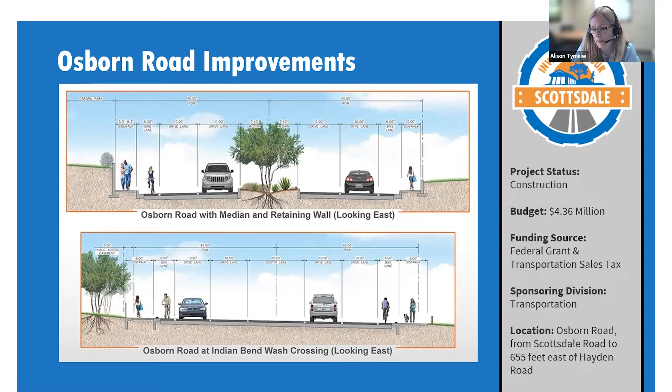I'm going to start talking about some of the projects we have either in construction or design. This slide shows the Osborn Road Improvement Project, located on Osborn Road from Scottsdale Road to Hayden. It includes the construction of bicycle lanes and sidewalks along this segment, a connection to the Indian Bend Wash Path, and a roundabout at the intersection of Osborn and Miller. The project is currently under construction and scheduled to be completed by the beginning of 2023.

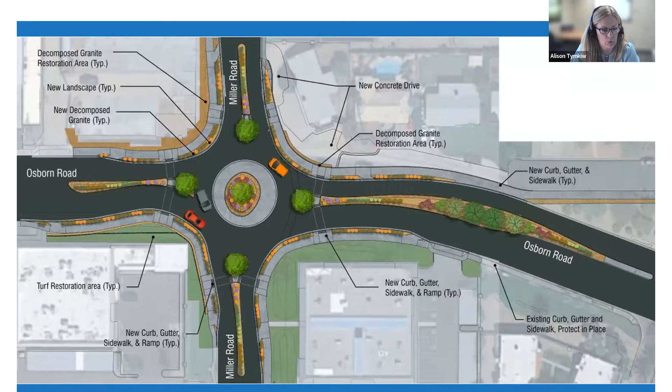The next project is the Raintree Drive Extension Project, currently under construction and funded by the Transportation Sales Tax and MAG Prop 400. It is located on Raintree Drive between Scottsdale Road and the Loop 101 freeway, and is intended to provide a direct connection from the Loop 101 to Scottsdale Road through the Airpark. We are planning roundabouts at 76th Place and Redfield, and at Hayden and Raintree.

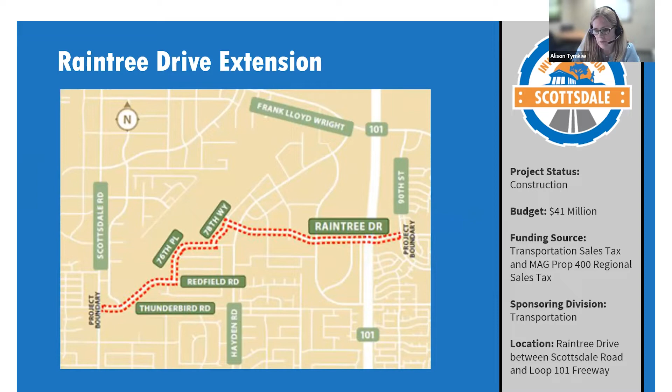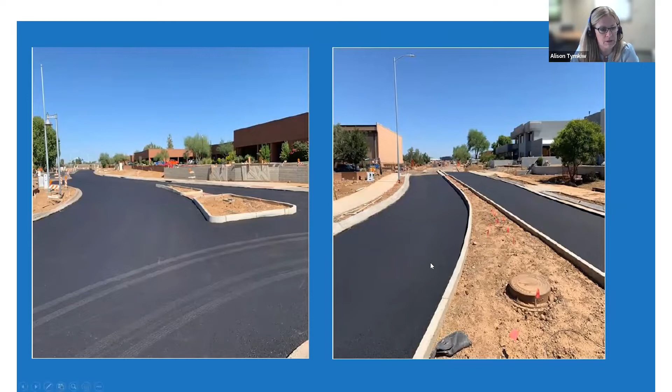The next slide shows the construction at 76th Place and Redfield, where the roundabout is actually being built right now. These pictures show the base pavement that was already installed, and the following ones show the roundabout further along, including the landscaping in the center. We still have to complete final pavement, and after that, striping will be installed.

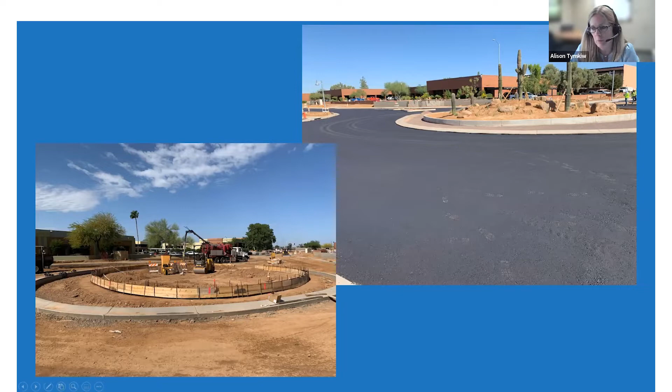The next project is another transportation-funded project: Pima Road improvements from Pinnacle Peak Road to Happy Valley Road. This project will increase the capacity of Pima Road with additional travel lanes in each direction, a raised landscape median, curb and gutter, bike lanes, and an 8-foot sidewalk on the west side. It also ties into the Happy Valley Road project.

The two projects have been designed and will be constructed simultaneously, including intersection improvements at Happy Valley Road and Pima.

This Happy Valley section also includes two roundabouts, one at the intersection of Golf Club Drive and the other at the intersection of Alma School Road. These slides show an aerial view of what the roundabouts will look like, as well as a 3D picture of their appearance.

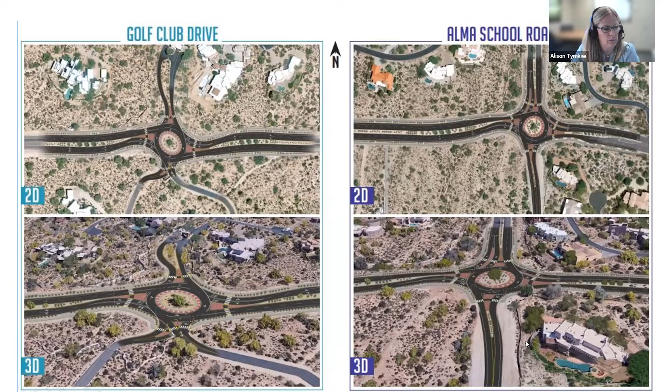So not all of our projects are highly visible like our roadway projects. We also have several water projects under design and construction.

This one specifically is the Aquifer Storage and Recovery Wells project, building deep well recharge and recovery facilities to ensure long-term sustainability of the city's drinking water aquifer. The city uses this aquifer for both long-term and short-term storage of water, and it supports improved storage capacity to meet safe yield and enhance drought preparedness.

This is a picture of one of the wells currently being drilled. We have 4 wells at four separate sites, and the pipes to connect them to the water campus are all part of this project. Site 1 is at the northeast corner of Miller and Deer Valley Road. We have another site at Legacy Boulevard and North Scottsdale Road.

The first well is in the equipping phase, and for the second one, drilling is complete and we're preparing plans and submittals for the equipping phase.

The third site is located adjacent to the parking at the Scottsdale Sports Complex. That drilling is underway and should be completed next month in July.

The final site at the northeast corner of Hayden and Mayo, we're still waiting for land acquisition for that site, which is a portion of the previous state land sale done at that location. Once we acquire the land, we will start drilling that well as well.

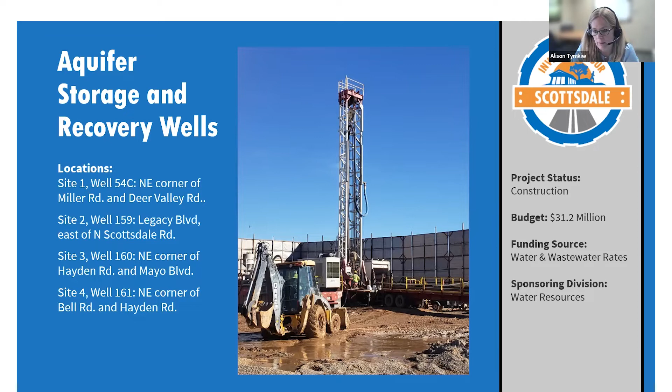We also have a project called the Park Restroom Replacement Project, which is replacing existing restroom facilities at several parks throughout the city. This rendering is the typical look of what the restrooms will look like.

The first park we're going to replace the restroom at is Paiute Park. We'll also be working at Eldorado, Pima Park, Chaparral Boat Dock, Chaparral Park, Scottsdale Ranch, and Thunderbird Park, improving our park facilities as well.

Next I'm going to highlight the Bond 2019 program. For the first phase, the department submitted project requests during the annual CIP development. The project requests were reviewed by staff and then by the city CIP subcommittee, which refined the program, and then the city council voted on what was presented.

Then the election was called. We started out with 145 projects identified by the departments. Through that process it became 67 projects, and then 58 projects were voted on and approved by Scottsdale residents in November of 2019.

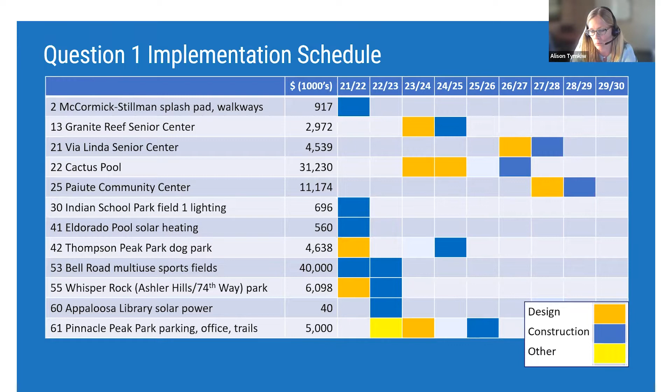The first project I'm showing is the multi-use sports fields in the area of Bell Road. This is a $40 million project, and it's actually 3 projects: the DC Ranch Community Park portion, the Bell Road Sports Complex, and the Westworld Sports Complex. The Bell Road Sports Complex, along with the portions of offsite water at the DC Ranch Community Park, were phase 1, and phase 2, currently under construction, is the Westworld Sports Complex.

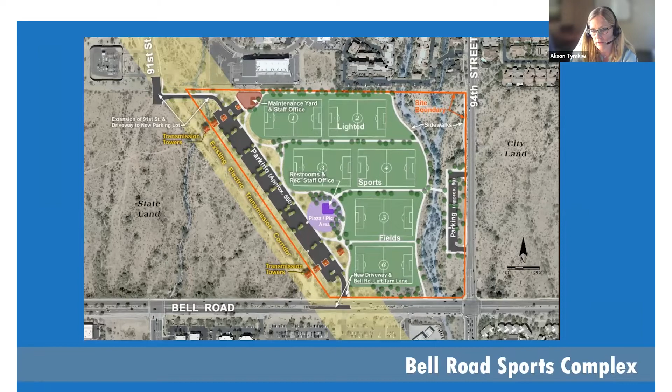The irrigation of the sports fields comes from the irrigation lake at the DC Ranch Neighborhood Park. We built the lake, the pump station, and the required piping to bring water to the fields, and the water is reclaimed for irrigation. The actual neighborhood park, DC Ranch Neighborhood Park, is currently still under construction and is expected to be open later this summer.

Then the second phase, which I had highlighted, under construction now, is the Westworld Sports Complex. This rendering shows the fields that will be constructed there, and the picture shows what work is happening right now, basically grading. The current construction contract includes the parking lots, utilities, irrigation, landscaping, field construction, hardscape, and lighting.

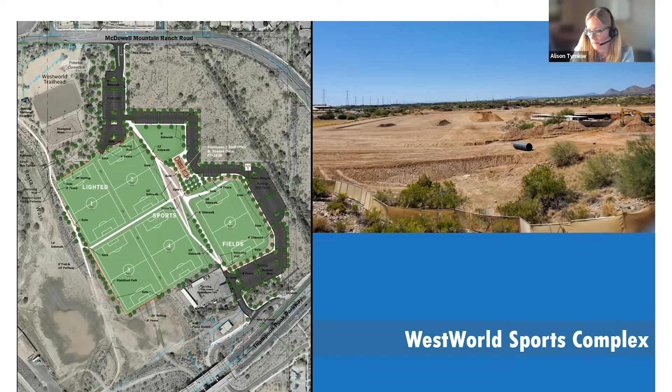Then we have the Ashler Hills Park, located at Ashler Hills Drive and 74th Way. It's a $6 million bond-funded project. This project includes open turf areas, a shaded playground, restrooms, lighted sport courts (1 basketball and 8 pickleball), walking paths and trails, and a parking lot for approximately 70 spaces.

This is the aerial view with the conceptual park amenities shown on it. The north arrow is actually to the right. The amenities highlighted here are located towards the south end of the park, and the natural area open space and walking trails are located to the north to buffer the existing residential area.

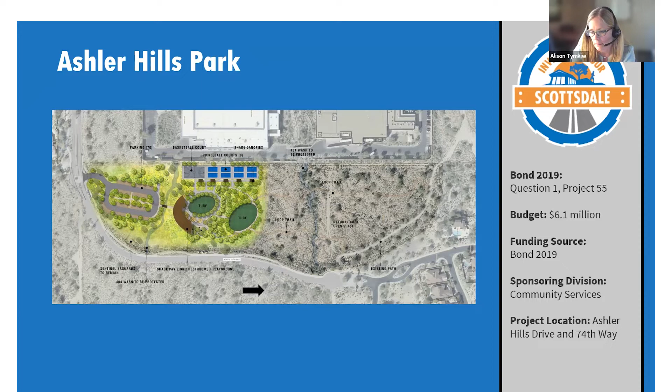This project is currently scheduled to go to the DRB, the Development Review Board, in July. We've had a lot of public involvement on this project, including 2 public meetings, and we were just at the Parks and Rec Commission meeting with this project last week.

Here's a rendering of the entry bridge. As you can see, it's a bridge that would go from the parking lot onto the site. This shaded structure shades both the playground area, and the restroom building is enclosed under there.

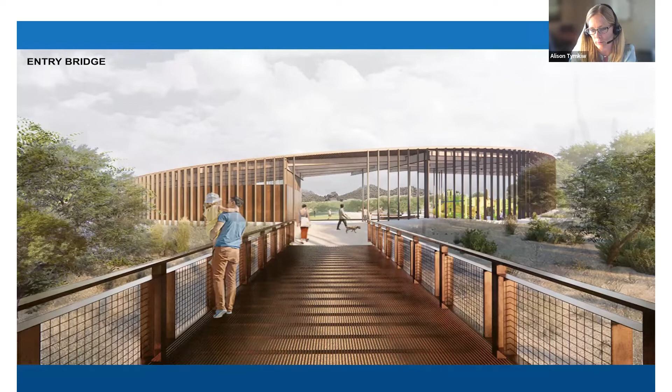This is another view, from the lawn, one of the turf areas, looking back at the shaded playground area as well as the restroom building.

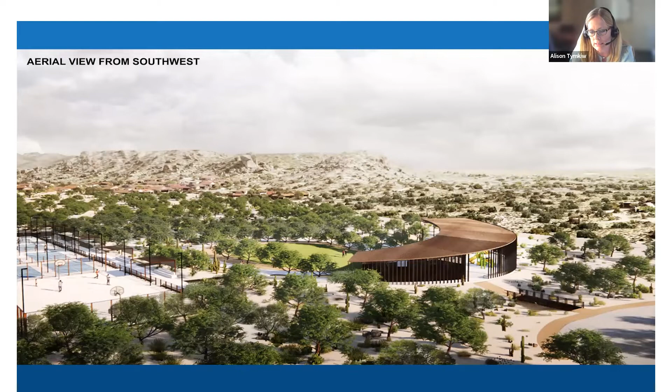This is another aerial view from the southwest. You can see on the left-hand side of the screen where the lighted sports courts are, and then the shade structure as well as the turf areas.

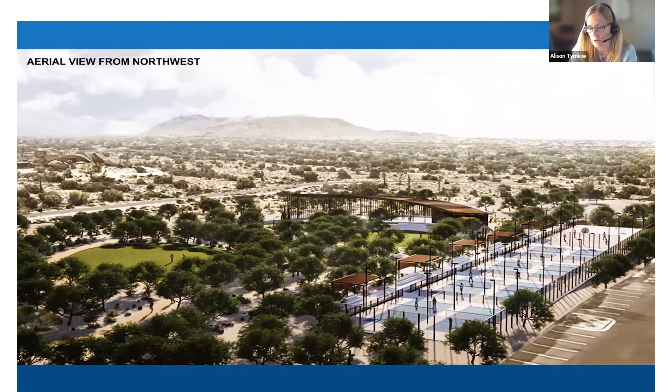We have another aerial view that looks from the northwest. You can see on the right-hand side of the screen where the sport courts are, and right beyond the sport courts you can see a parking lot of an existing commercial development area. The sport courts are nestled up against that area, so they're further away from the residential area with less impact on the neighborhood.

The next project is to add a dog park at Thompson Peak Park. This is budgeted at $4.6 million, located at Thompson Peak Parkway and Hayden, adjacent to the existing Thompson Peak Park that's already there.

We're looking to construct approximately 3.5 acres of off-leash developed turf area. The areas will be separately fenced and gated. There'll be a footbridge to the existing amenities at the park, and approximately 100 space parking lot will be constructed. We're currently in the design phase of this project, and construction is actually funded in fiscal year 24-25.

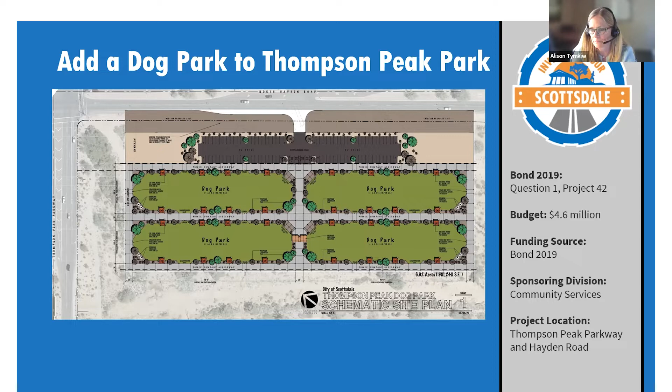We're also working on plans for road and pedestrian improvements on 2nd Street in the downtown area, as well as improvements to the Indian Bend Wash. We're working on replacing some of the WestWorld horse barns to increase rentable space. We'll also be installing solar at the city's North Corp Yard, where we're building a new parking deck, and solar will be installed in conjunction with that project.

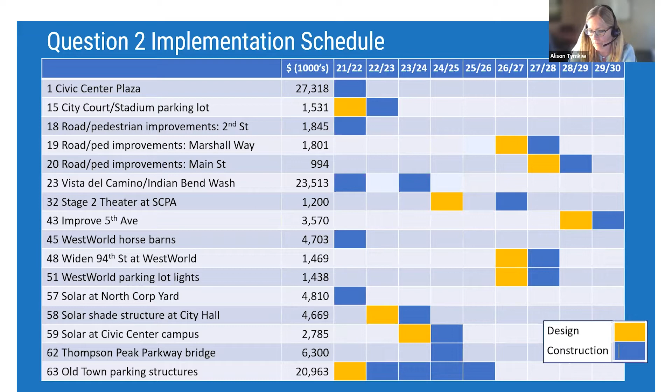The first project I'm going to highlight is the Civic Center improvements. This project is budgeted at $27.3 million, and it actually includes another project, to provide free public Wi-Fi at the Civic Center Plaza, which will be part of this construction.

Currently, it's under construction, with storm drain, water and sewer nearing completion. Irrigation is in process, we have some critical path electrical work going on, and we're currently doing some planter and retaining walls on the west entry of this area.

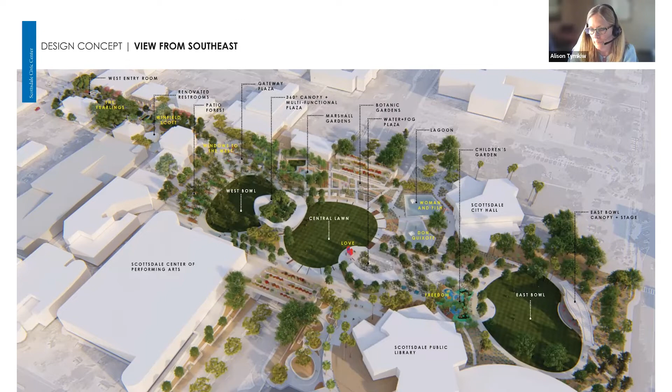This is a perspective view of what it will look like when it's complete.

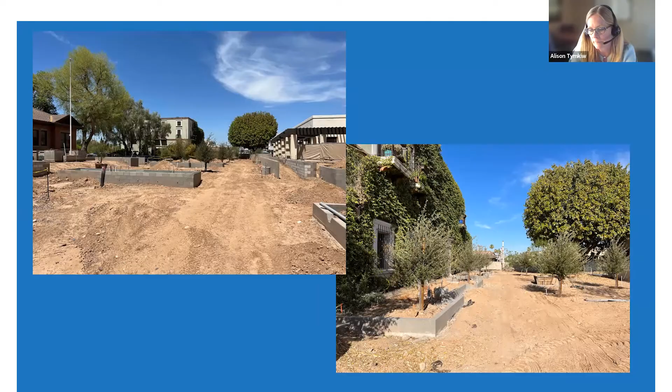Again, more earthwork and grading, which is currently occurring.

And more earthwork and retaining walls in that same area.

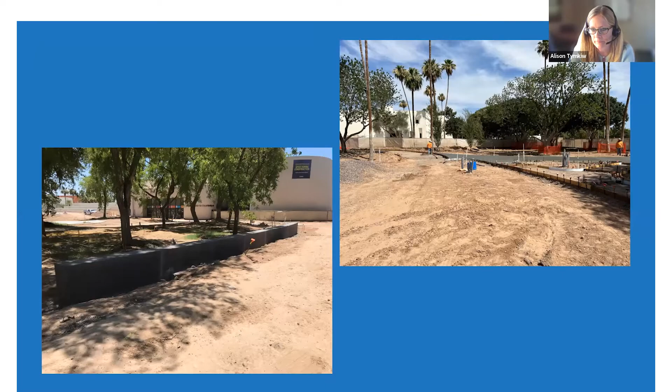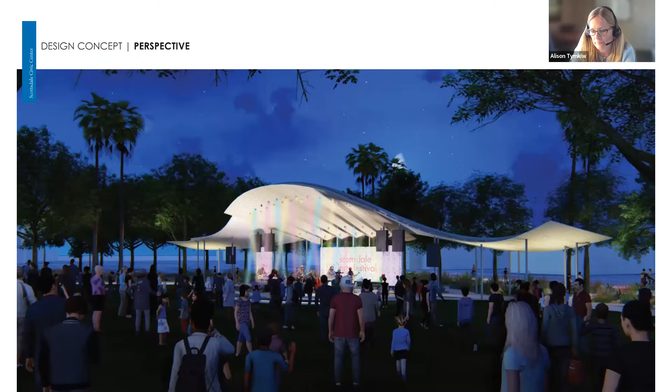We're currently designing the project. We have a construction manager at risk, with a contractor on board to help us through the design and pre-construction phase services on this project.

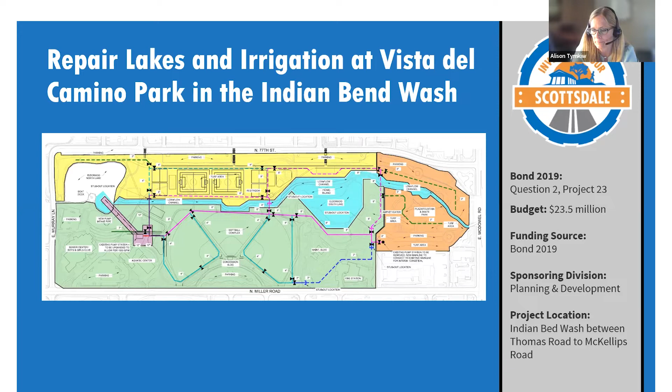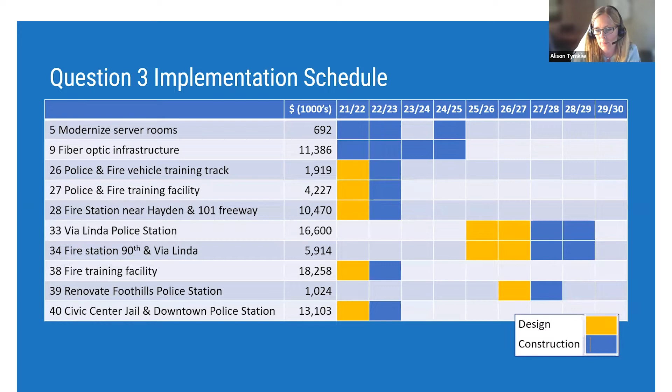Okay, this is a summary of question 3, the implementation schedule. There's a lot of IT projects that have occurred, as well as one of the big projects we're working on, the police and fire training facility.

Our police and fire training facility is located in the city of Tempe, east of Miller Road and south of Curry. We have 3 projects: one is to replace the vehicle training track, another is to expand the police training facility, and the third is to build a new fire department training facility.

We've recently gone through some of the public hearing process through the city of Tempe, and we're working towards 60 and 90% design on both the police training facility and the fire training facility.

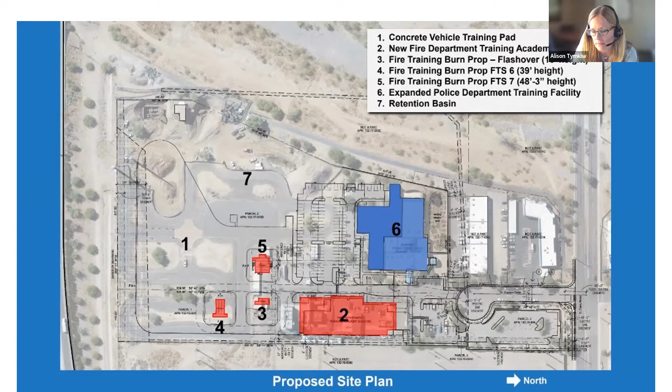Highlighted in blue on this site plan is the expanded police department training facility. There's going to be some upgrades to their shooting range, as well as upgrades to a lot of their classroom facilities and other amenities within the existing building.

This shows the proposed fire training academy. It's a brand new building, and you can see the 3 proposed fire training structures that will be on site as well.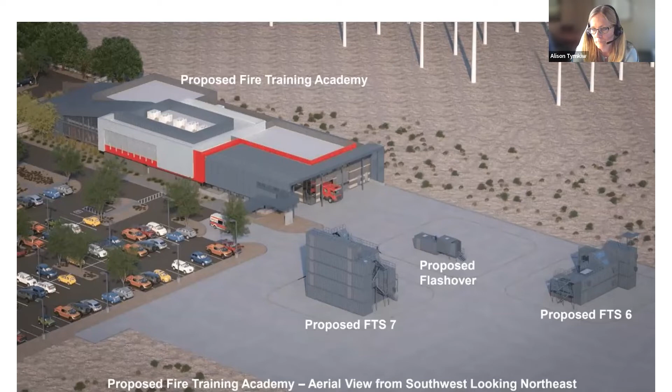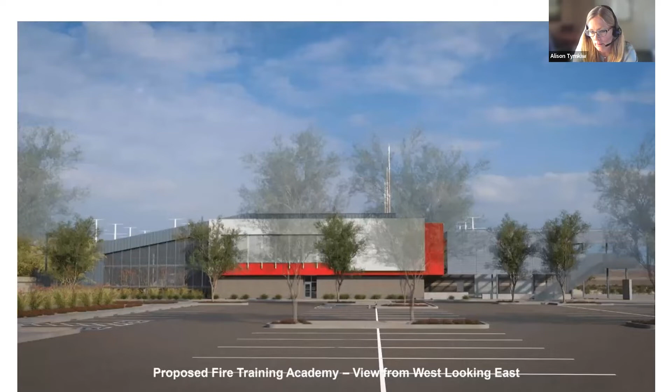This slide shows the proposed fire training academy, viewed from the southwest looking northeast. This is another view of the proposed fire training academy from the west looking east. And just another view of the fire training academy on that site.

And with that, that wraps up my presentation, and we're happy to take any questions.

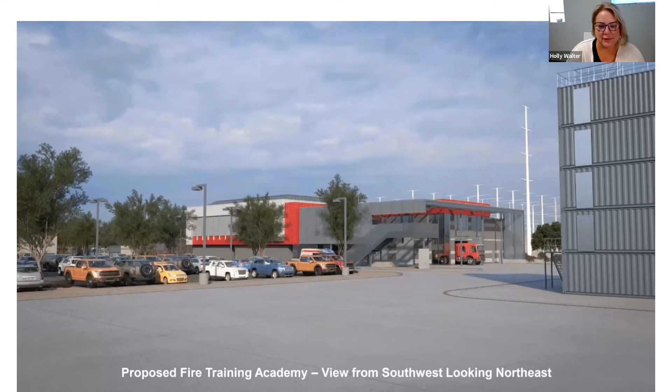One of the attendees had a question about fixing potholes. I know this is an area street operations attends to, but are street repairs often wrapped up within capital projects? Well, yes, it is part of our street maintenance program. However, a lot of times if we have a transportation project coming up, that work gets deferred, knowing we'll be replacing the roadway with the project. So sometimes it might seem like streets are in disrepair for a little longer than necessary, because we don't want to repave a street when we're going to tear it up with a capital improvement project.

We can provide additional information on how you can contact that area of the city if you have concerns about a particular area of Scottsdale. Another question, maybe referring to the aquifer, is how much does this plan increase our overall water storage or collection? I actually don't have the specific answer for that. That's something we could look into and get back to you on.